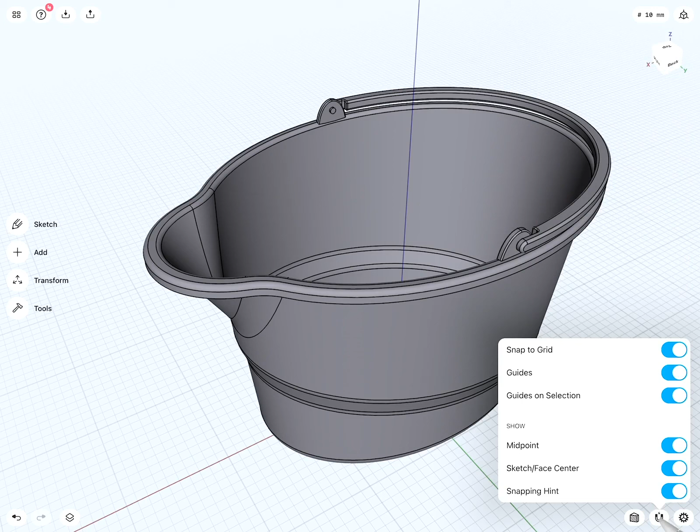Further, the reference file includes all the individual modeling steps, so you can study how I approached solving this design problem. Before we continue, we want to make sure that units is set to millimeter and all our snapping and guides are turned on.

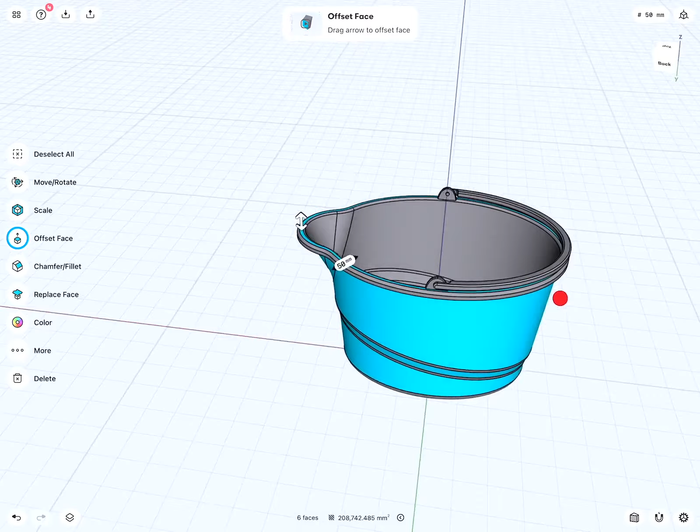For reference purposes, to study, analyze and learn from this model, I included the final design inside the Shapr model. When we look at the surfaces, we can see various design problems or surfacing challenges. For example, these two surfaces are offset, plus there's a transitional surface. We have a spout that is very nicely joined, and we have a rim with a thickness that runs all across, and to make matters even more complicated, the bottom face is at an angle.

Now all this looks rather complicated. It is, however, very easy when, instead of seeing the complexity of all these problems, you break it down into smaller problems and then solve it via smart sketching and modeling.

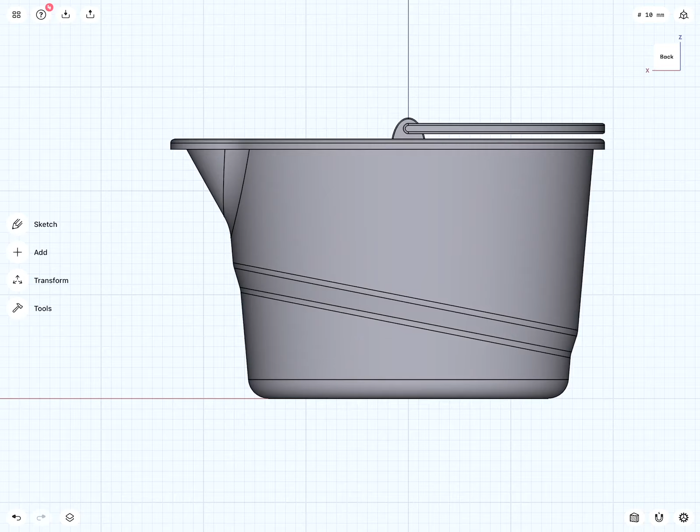So with that said, let's go to bottom view. We will make a sketch, ellipse from the center, a sketch that is 160 by 110. There we are. This we will call base.

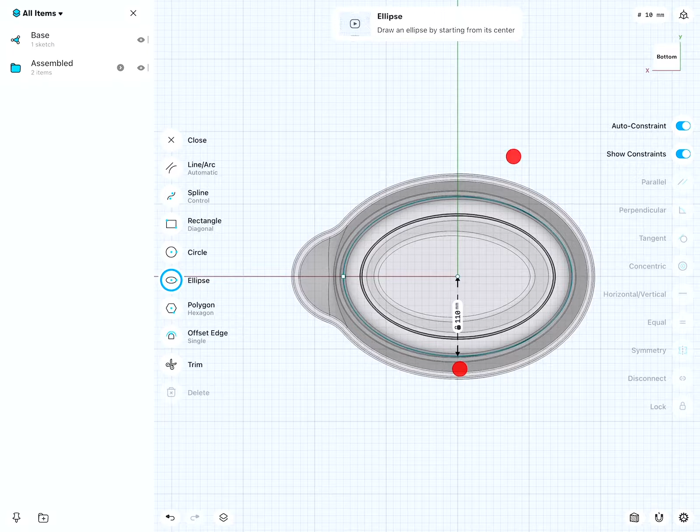And I will hide this. To match the design, this has to be extruded up 250 millimeters, and we will add a draft of -5 degrees. So you see, this shape could also be created via two sketches and a loft. This, however, is much faster — one sketch, one extrude with a draft.

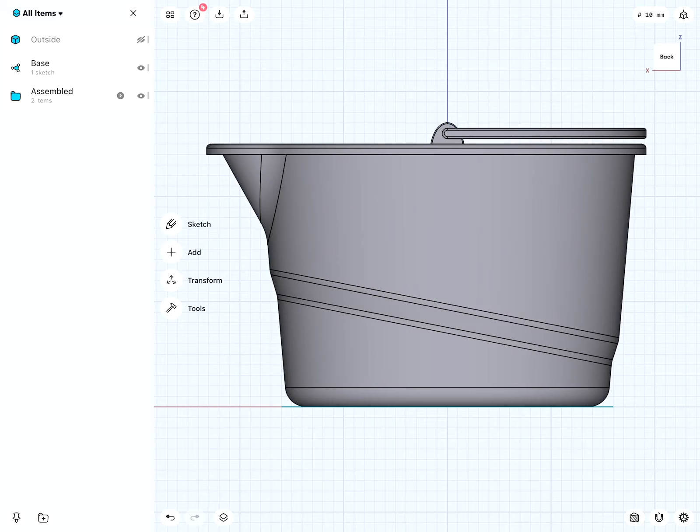We will call this outside. And I will hide this. Take a look at this view, and we see that now we have this surface that is offset, or smaller, so it sits on the inside.

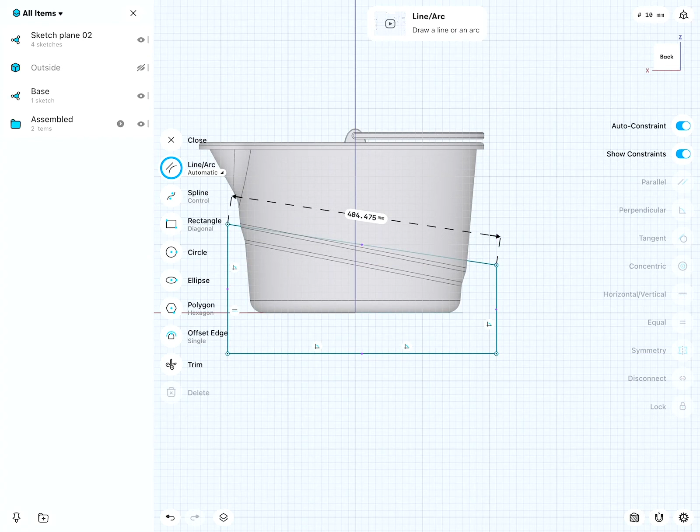To create this, we will continue making a sketch like this. This should be 101. We make another line. These two lines will be parallel.

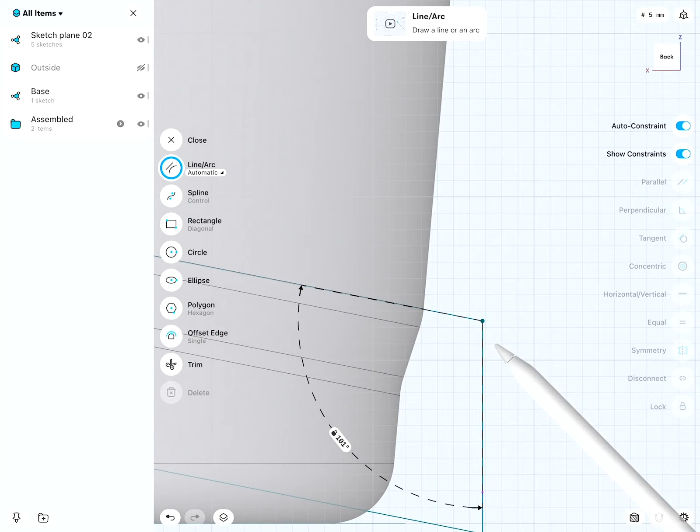Then we can zoom in more. The more we zoom in, at one point you see the grid will refine nicely. There, this position is good. Lock it. At this point we can move up.

These two lines have roughly a distance of 28 millimeters. Very good. We will call this also trim. And I can select these two profiles and cut. Then I select this and cut down. Now it works — two steps.

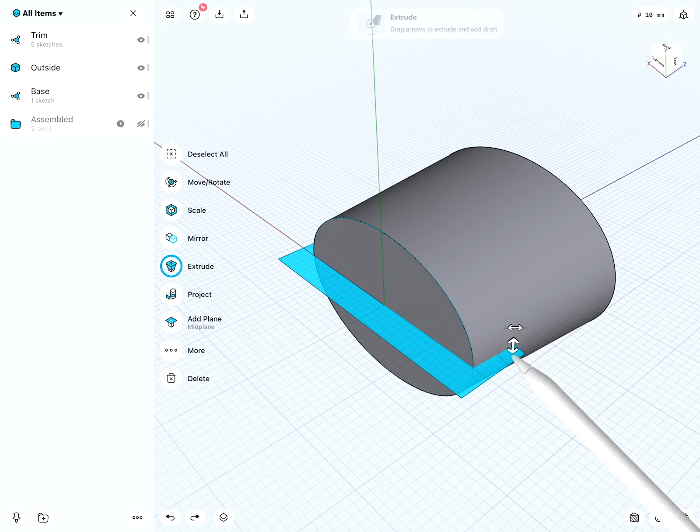However, I would like to make this even easier. So before I continue, I will select the whole sketch and move it down 200 millimeters, because now I could select and simply cut the whole piece out. Very good.

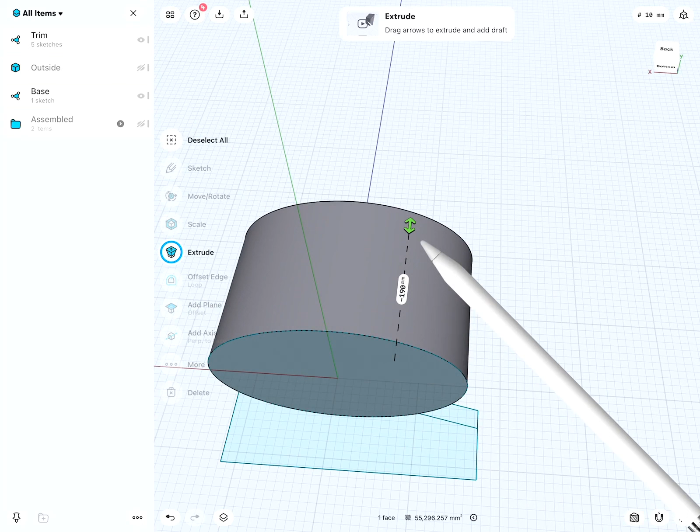This I will hide. Let's make another body: 190, -5. Very good. And then I select this, go up, and here we select intersect. This will be the inside.

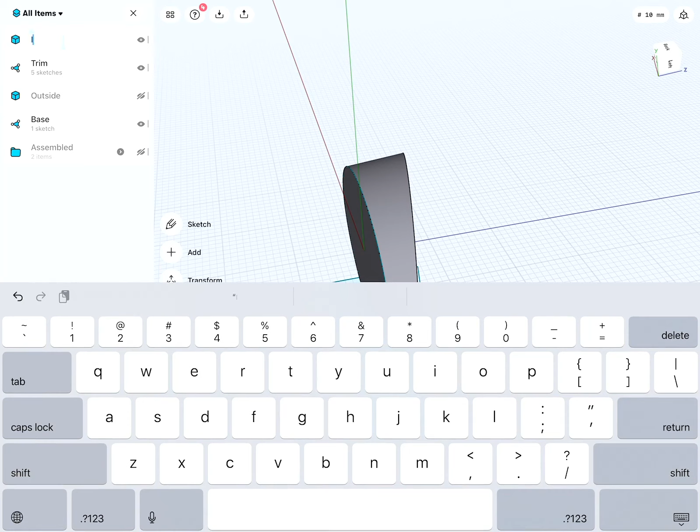And when we take a look at this, you see the sides are kind of like the same. So the surface now we have to offset. I will use 5 millimeters.

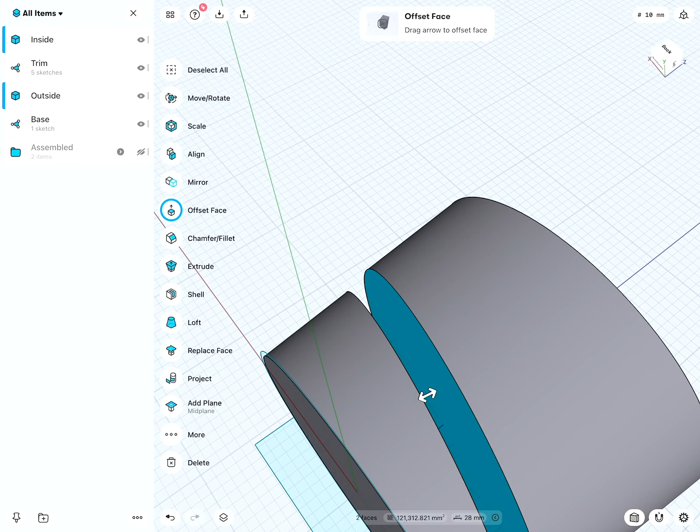To create the transition between this face and this face, we will use the loft command. There we are. And then selecting all three objects, select union to join them together. Let's call this bucket.

We will go back for the next step soon to the base sketch. Before we could do this, let's add a 15 millimeter radius there, and here we can add a 25 millimeter fillet — radius, sorry.

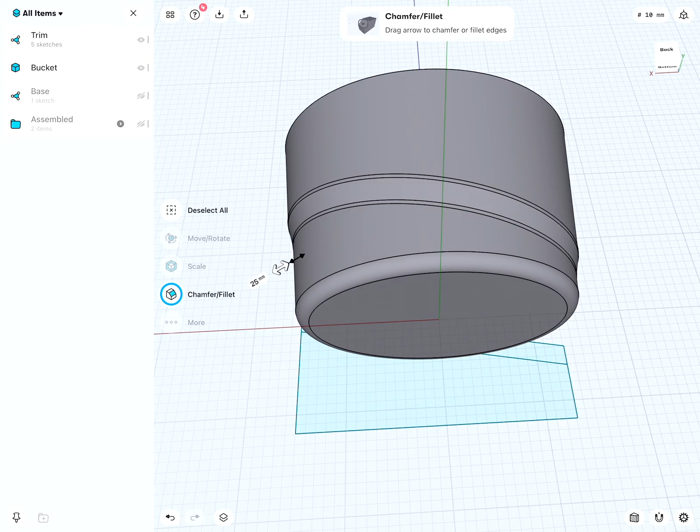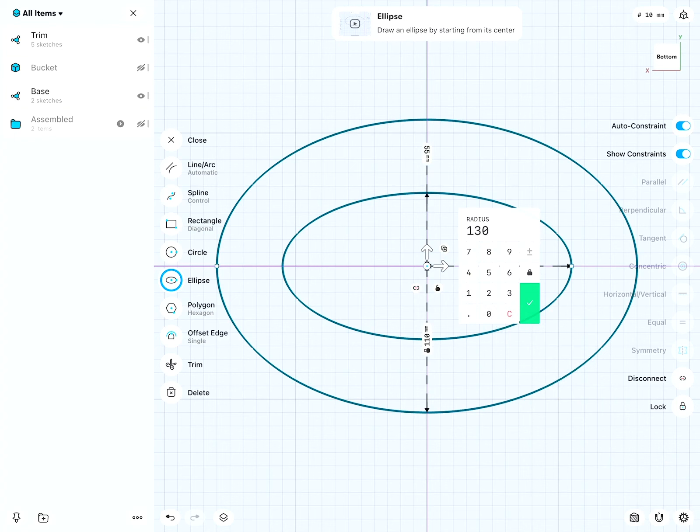Let's go to base, turn bucket off, select this sketch with a finger double tap, and we will add an ellipse again. This will be 130, and this 110 minus 30 is 80. So we have, from the bigger to the smaller ellipse, an offset of 30.

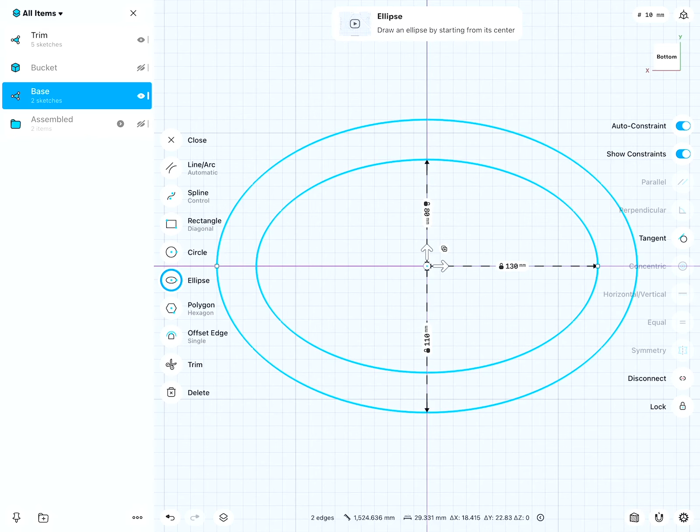When I have very basic geometry, I like always to redraw it by hand instead of using the offset command, because very often offset commands will create a more detailed offset path. So in this case, this was not very complicated to do.

We will show the bucket one more time. Then we will select this new fill, extrude it 20 millimeters in, and it cuts. And then we add a positive draft of 45 degrees.

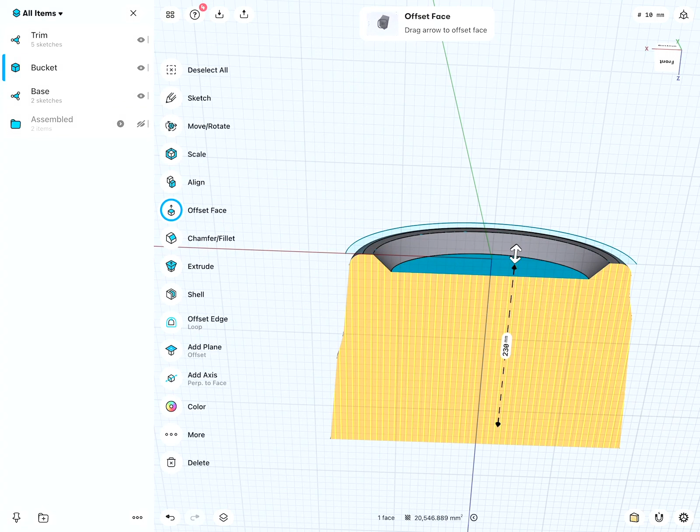Very nice. And we would like to rotate this face. So we can select it, then go to move and rotate. I made sure where I want to have the spout later, and this I rotate by 3 degrees.

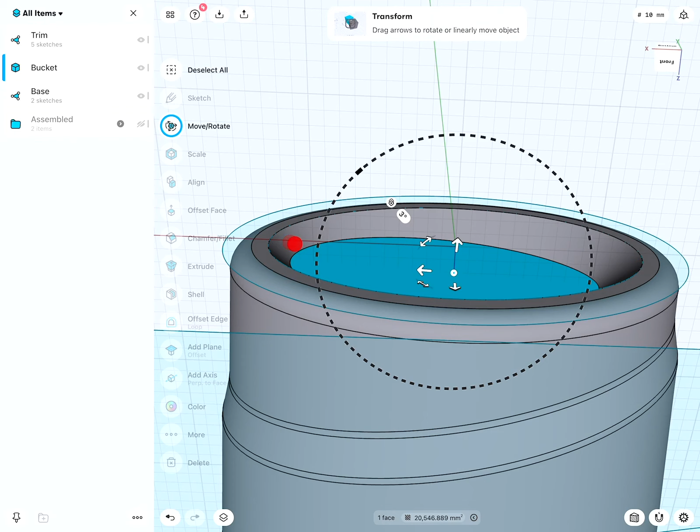The spout I have on the left side, so my hand to hold will be here, which means this has to be 3 degrees. So I have a bigger area here — I don't need a bigger area there. Very good. Now then I can go ahead and round these edges 15 millimeters. Very good, this looks nice.

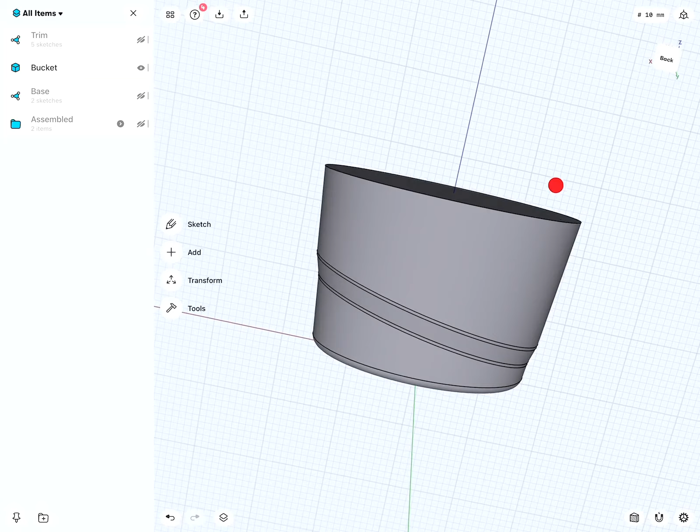The next step now would be to create the spout. I will select the top surface with my finger double tap — that lines up the grid. For reference purposes, I can turn on the target object, go to spline, CV, and start drawing.

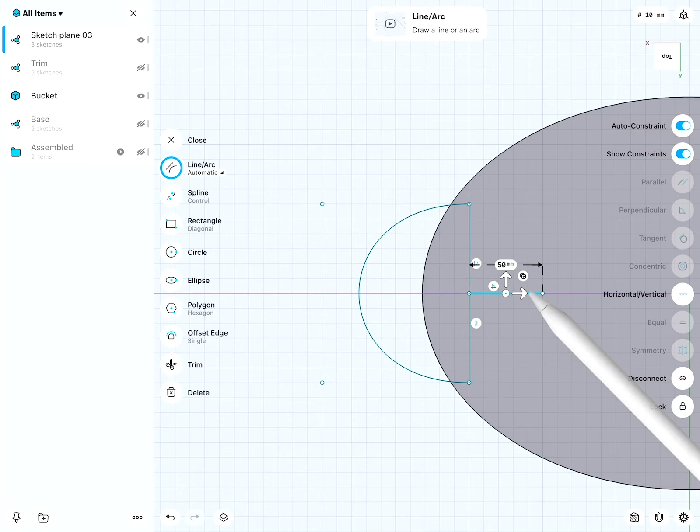And I press and release, go back to line and create myself a quick profile. This all looks really good. Just a little tip: you see here the midpoint is lined up to the x-axis, which means then I can use the grid and simply count the positions and make sure all these points along this line are symmetrical. Very good.

This I will hide. This whole object I will extrude down 90 millimeters, shrink it via the draft. And here comes now the interesting trick.

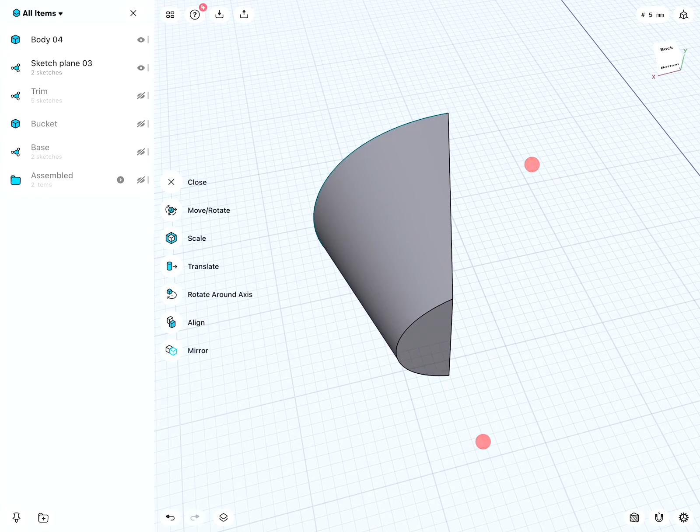We will select the face and this edge, turn on bucket, and then we just move it in there. And then there we have this beautiful transition.

So you see also here, the spout we just create via one sketch and one extrusion command, and then we move the target edge. So we don't need two sketches for loft.

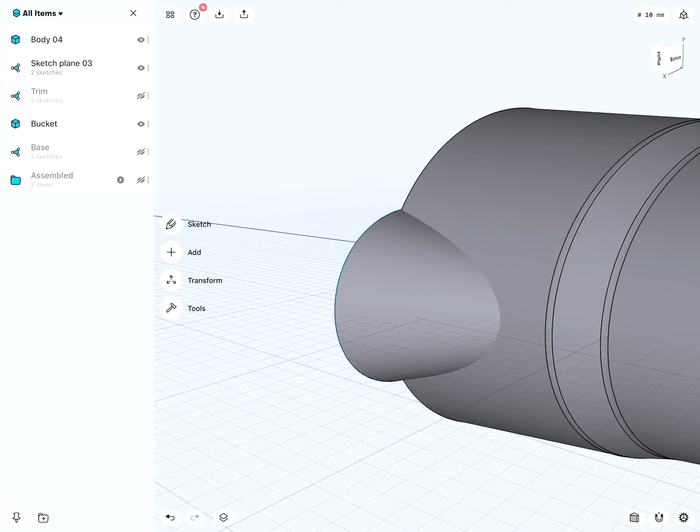The two bodies we will join. So they are one. Very good.

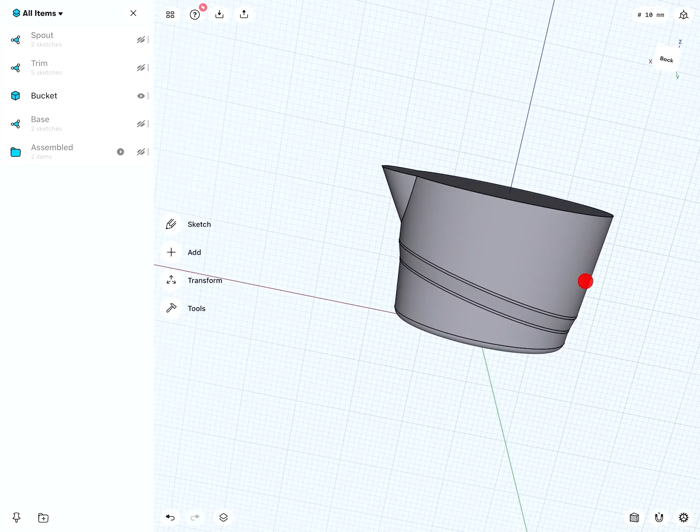This we will rename spout, and hide, we don't need it for the moment. So you see, so far this was actually a fairly simple process.

We give this a really nice and generous fillet, 50 millimeters. This is very good.

And to now create the rim, we'll go to the back, and we'll go to here and draw myself a line. 16 millimeters. This goes down 10.

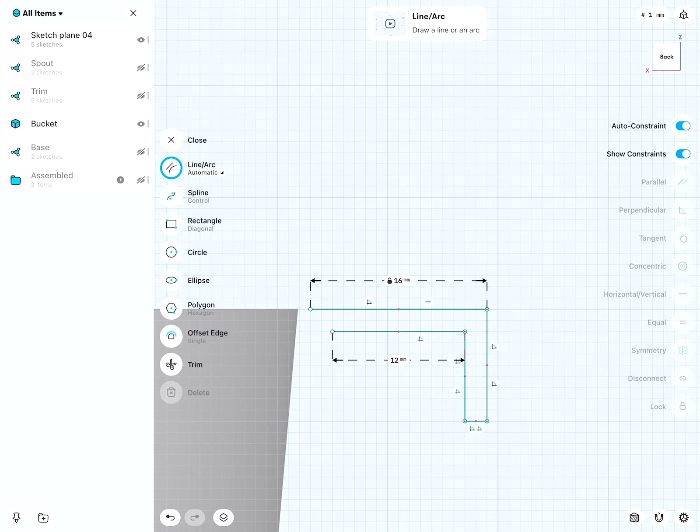2 millimeters. I use the grid here, or I can also give specific dimensions to make sure everything is the same, the way it should be. Could also say these two lines should be the same, so I use simply equal.

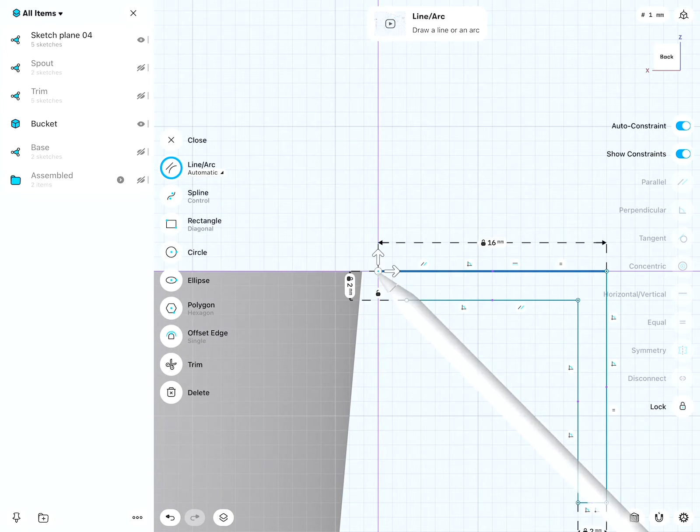And because I'm using the grid and the first body was extruded up with 250 millimeters, terminating at the grid, I don't need to project any line from this 3D model into the sketch. I simply use the grid and line up everything.

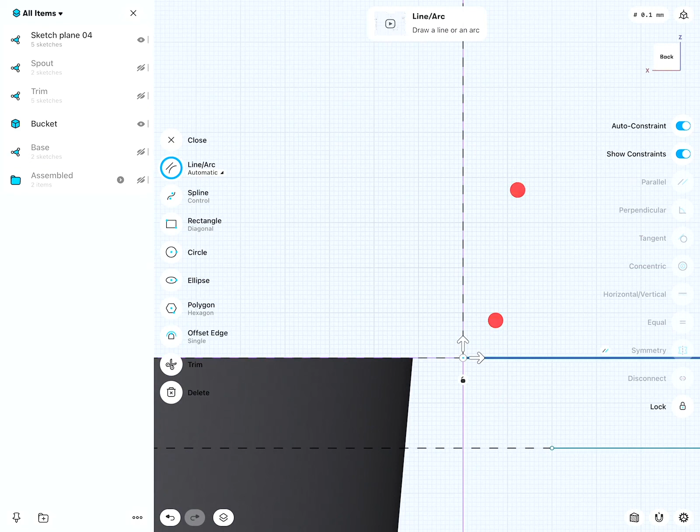So I will move this to there. We will make this 15. Now I bring this over, overlap this, so I'm overbuilding, and this I move to here, draw a connection, and then this point sufficiently move in there.

This is at a deep angle because this is a really deep line or angle there. You see that too. So I need to match this.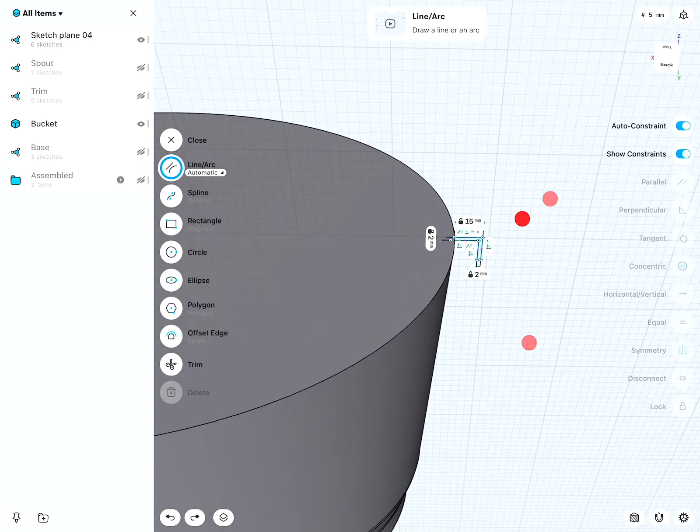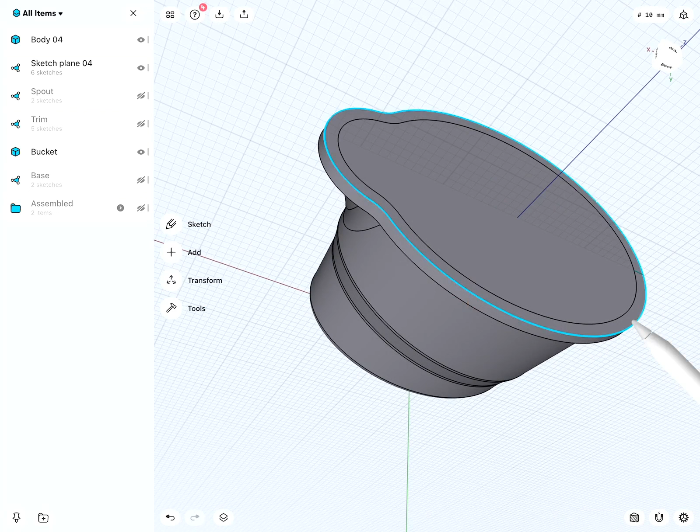Then I can zoom out, go to 3D view, select this profile, select all these edges, sweep, make a cut section, verify perfect, no gaps or anything, and the rim and this body I can join.

And then this. Let's call this rim. Very nice. Now the rim has a thickness of 2 millimeters, which means if we now shell this object, by

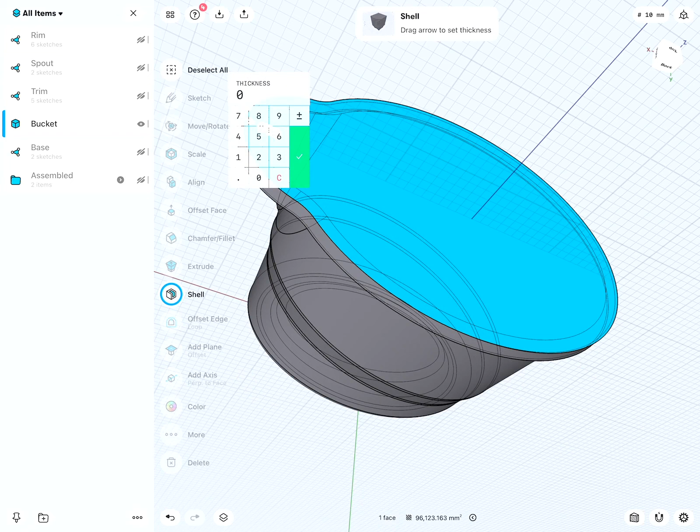selecting the top face, go to shell, we can only select it, or I can only select 2 millimeters or bigger. We can't go smaller because then the shelling would go into the lip. There we are. Very good.

Now we have here some very sharp edges, which is not good. This edge and this we will fillet with 1 millimeter.

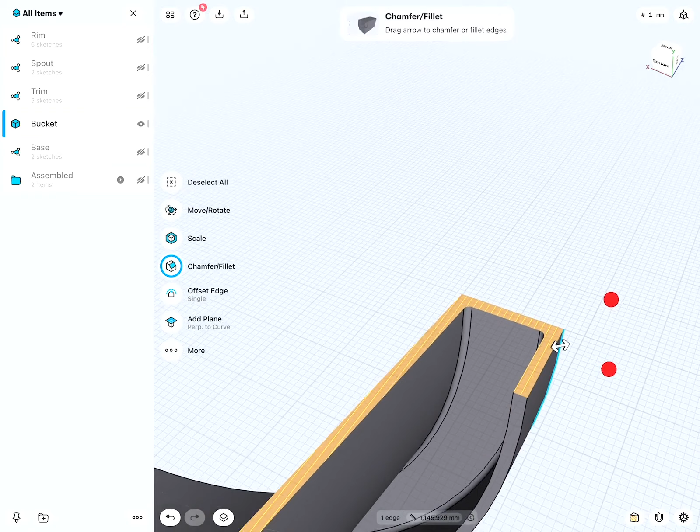These two have a thickness or an offset of 2 millimeters, which means then this is 2 millimeters plus 1 millimeter, means 3. So the outer edges have to be 3 millimeters.

So that we get a beautiful offset. Okay, very good.

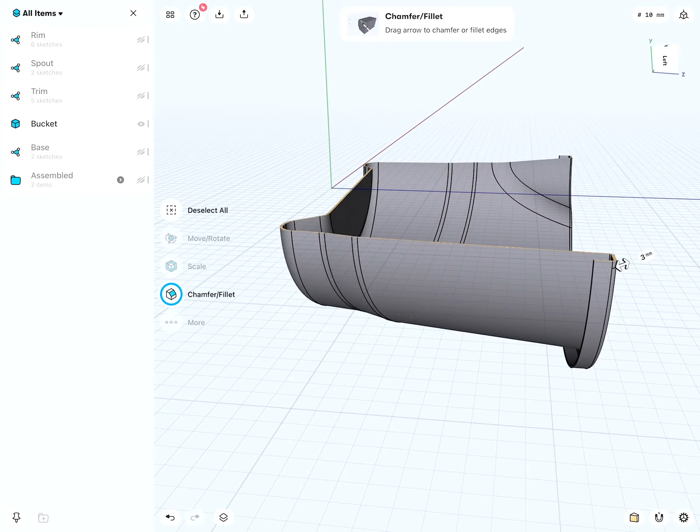So this is then the whole process, how we can build the bucket. As you can see, with a simplistic approach, only a few sketches, and then few modeling tools.

Then in this video, the next step then would be how we can model the handle.

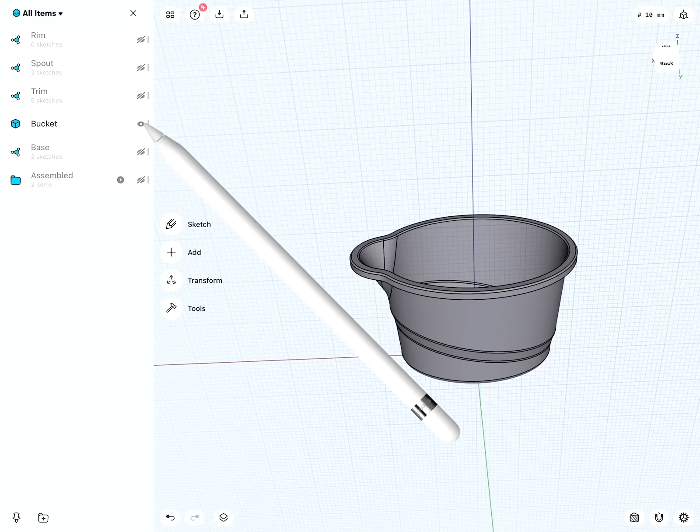I will hide this for the moment. Take a look at this. And there we can see we have these two sockets with a hole in between and the handle on top.

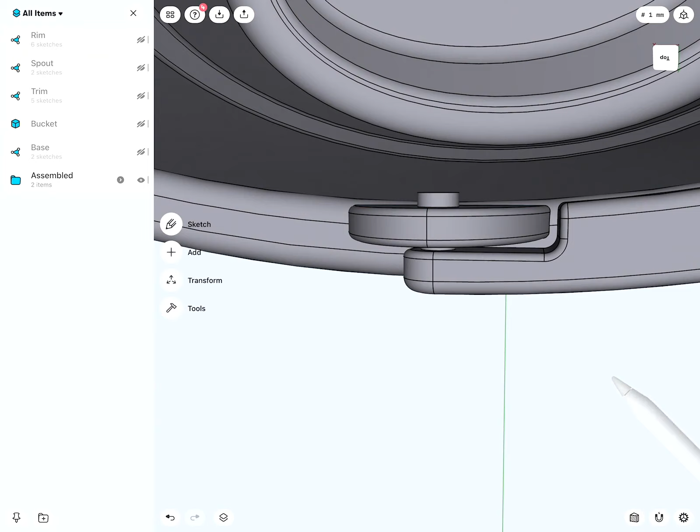And the handle also has a space and an axis. Also, this is quite simple to design. Okay. So we will

start from the center again. I will show my design here, go to there, zoom in a little bit, make a sketch, circle, and here this will be 3 millimeters. As you can see, this lines up to there.

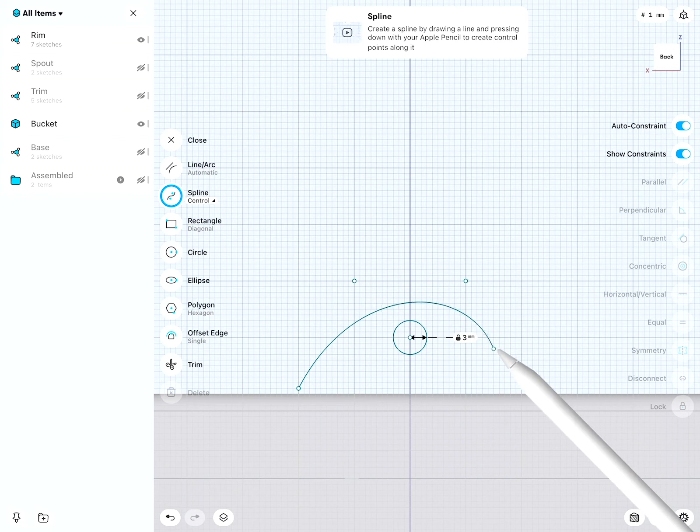Very good. I will use the spline curve one more time and create myself a nice arc that goes around. I will use here this to cap the bottom.

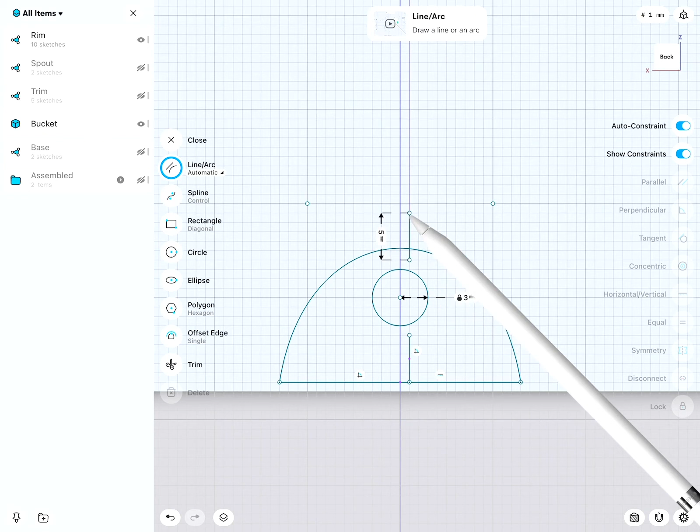Very good. So as you see, I clean everything up a little bit with the grid. So everything is symmetrical. This is around 5. So this is 5, which means then in these 2 points, when I select them, move them up there.

So this looks better. Very good.

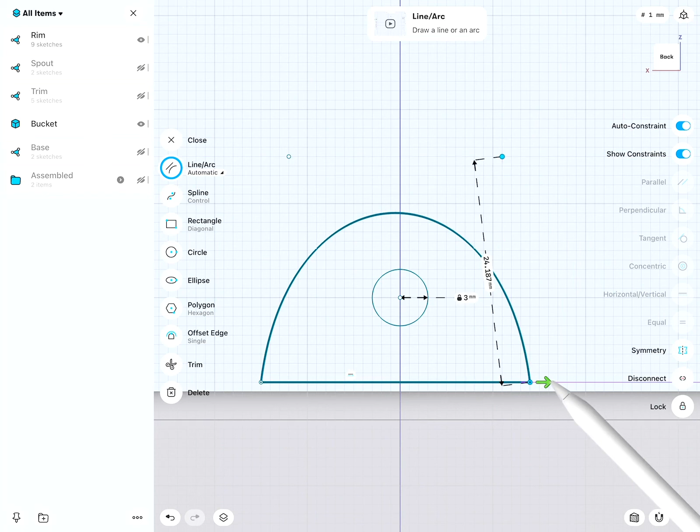To make things a little bit more thicker, select those 2 and then those 2, move them along the grid, 2 units each. Nice. And this I will move down. Very good. And maybe those 1 time up. There.

This was actually now added to the rim sketch. As you can see, this is joined. You can keep it this way, or if you would prefer to separate it, we can select this off our

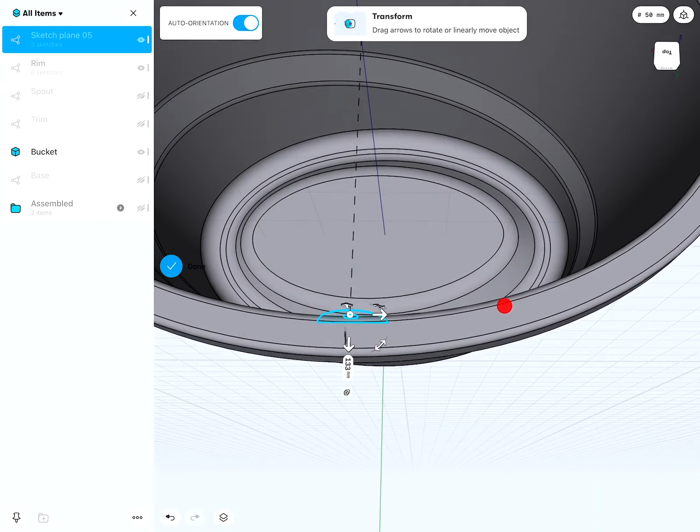sketch with the move command, then bring it over 133. Okay, very good. There we are.

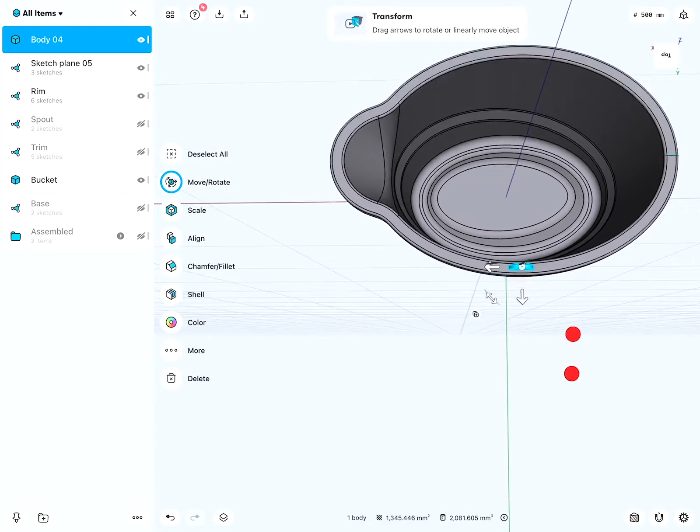We can select this, extrude it out by 5 millimeters. Double select it. Here's a nice little trick. You see the grid is vertical, and then I will go to mirror, select or simply tap on the grid, and that mirrors the whole piece over to the other side.

Very good. Now this we will call socket.

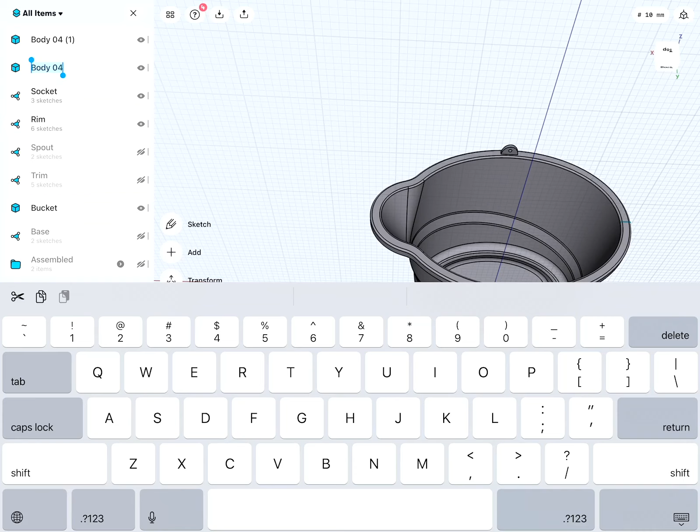And we could call the socket, but since we will join this later to the bucket, I'm not bothering with giving those a name. Everything else we can hide for the moment. We don't need. Also, this copy I will hide.

And I would like now to create the sketch for the handle centered on the cylinder.

When you select a cylinder, we can add an axis that runs through it. Then we can go to Add, Construction Plane, through Edge at an angle, select

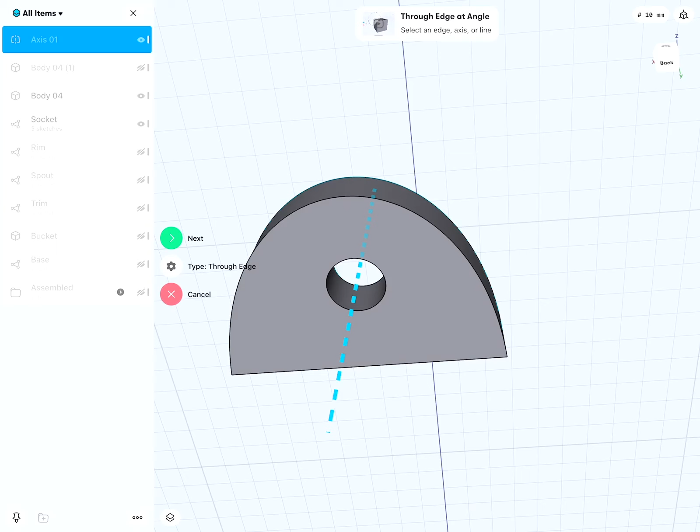this guideline, next, and this should be 90. That's horizontal. Very good.

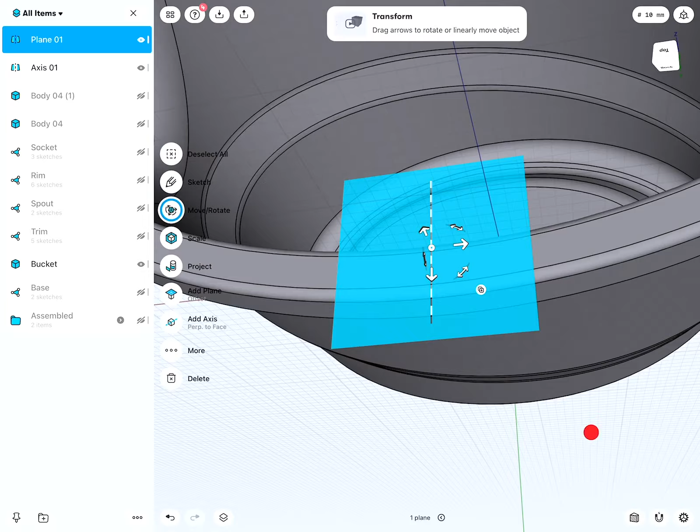Let's hide this for the moment, and also socket. Then we want to see our bucket. Select this construction plane, and then with our finger double tap, and now we are sketching right on this construction

plane. We will do an ellipse again.

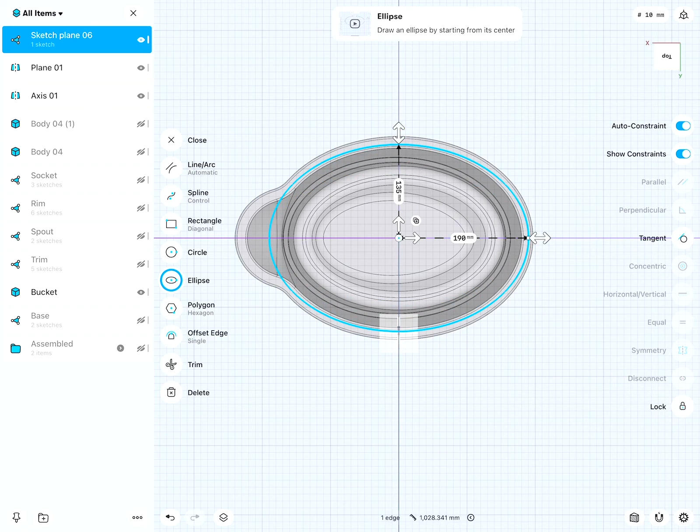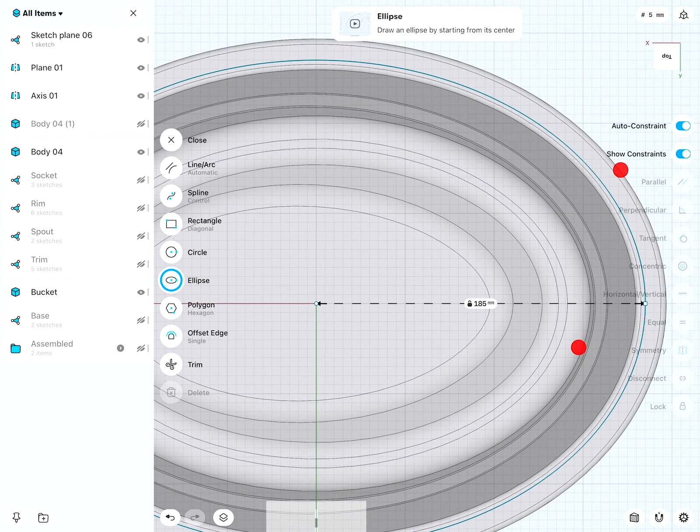It will help knowing also where our socket is. So this looks pretty good. So 135 by 190, so this is too far. 185, this looks better. I can see that all the elliptical shapes of my 3D model line up also with the sketch.

Then I will make one more ellipse, 195. So it's on it, very good.

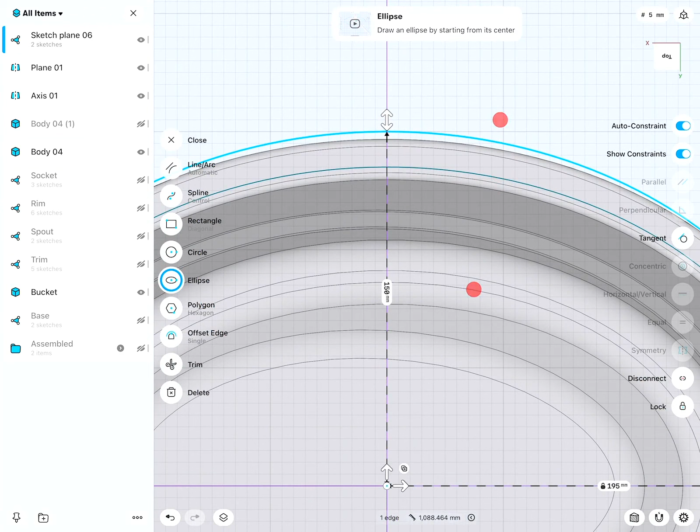Zoom this in. 145. Okay, yes, very good. Here's a little trick, because I want to work smart, not hard.

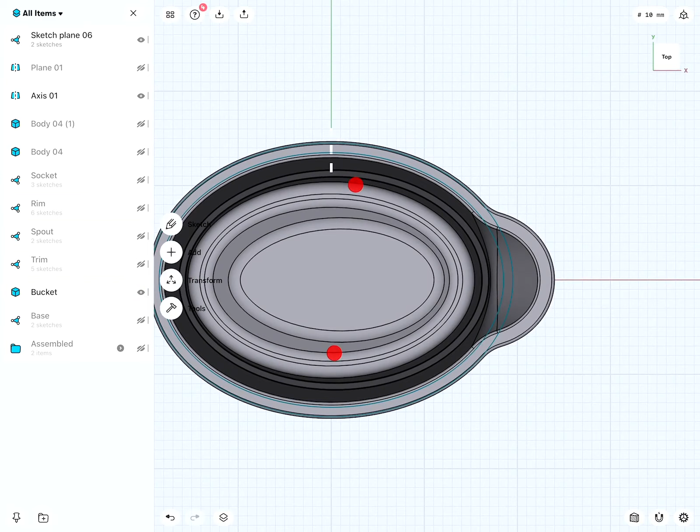I will create a line here, but be careful. You see, I just drew the line, but it put it onto the ground plane. So I will select this sketch one more time, put my finger, double tap. Now I draw this line into the sketch. Same here. Very good.

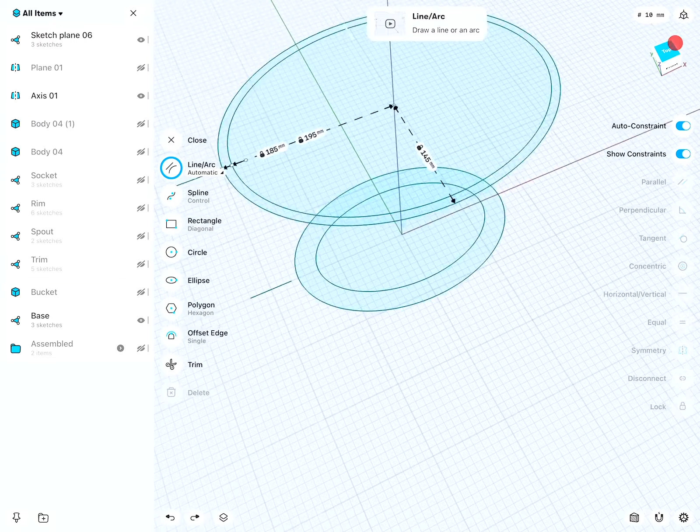I noticed that actually there it drew it over this axis, so I will hide it. You see I made the mistake one more time. So it's an easy mistake, by just going to top view. You just want to select the sketch or any plane, then double tap on it.

Then you're drawing in it. Now we can show these elements. Let's zoom in. We give this a distance here, go over to there. Snap this to the grid. Snap this to the grid. Very nice, so you see it's a millimeter distance.

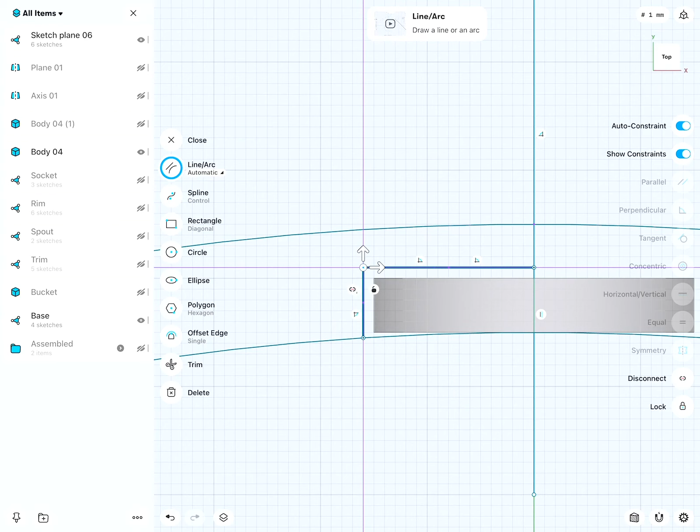Very good. So the reason why I did everything that way is, well, why should I make myself work hard when I only need to model this one side?

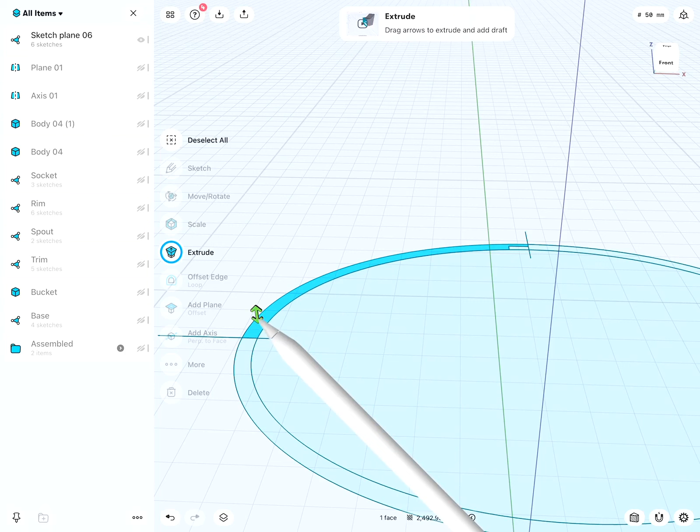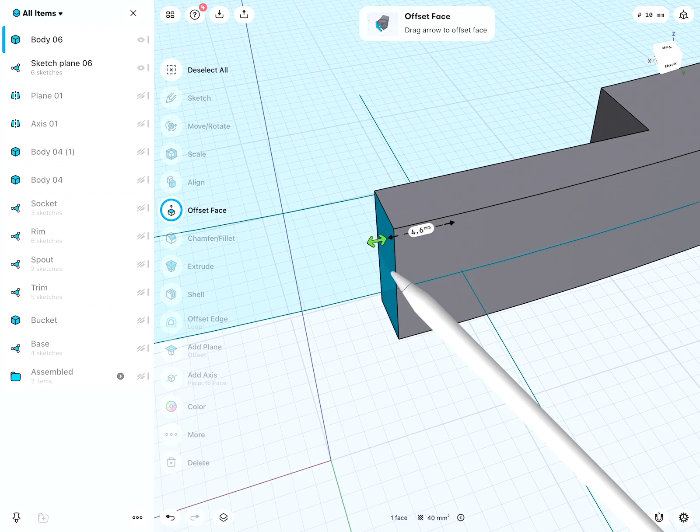So I extrude this down 5 millimeters. Then I will adjust the height to 10 millimeters. And we would like to add here 10 millimeters to it. Or actually 5. And then these two edges we round also by 5, turning this into a perfect cap that's round. There.

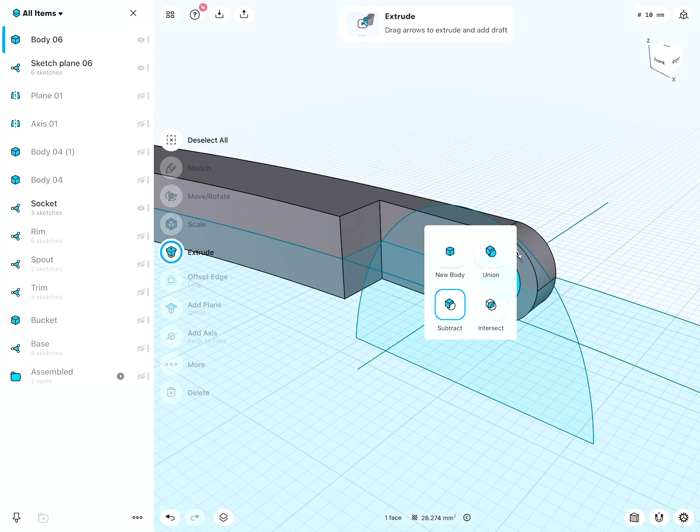Let's take a look at our elements here. There you see, this looks really, really good. Here's our socket. So from there we do an extrusion, but instead of cutting into it, we do a union, we join it.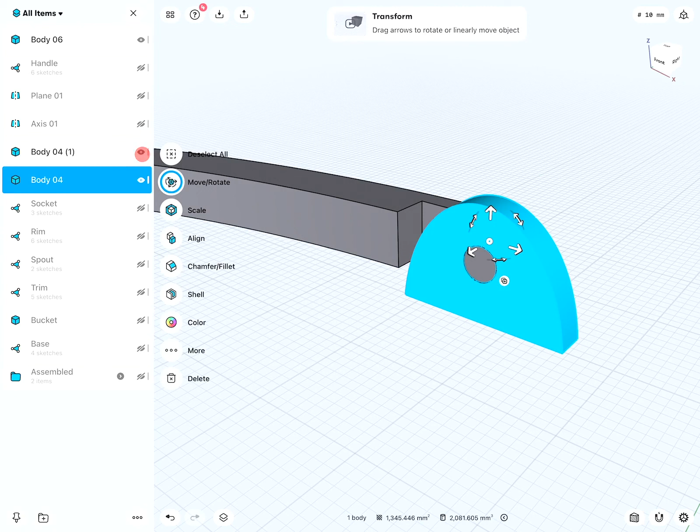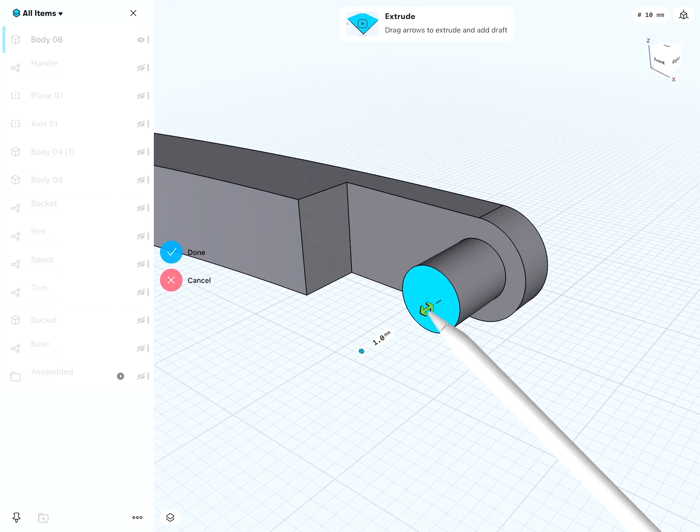What's the distance? This is 5 millimeters, which means if I would like to perfect this model a little bit, this I would like to extrude. By another 5 millimeters. Okay, so, and it's joined.

Very good, so you see that this is now inside it. Oh, actually it's not. Oh yeah, that makes sense. Sorry, my fault. This was already modeled flush added.

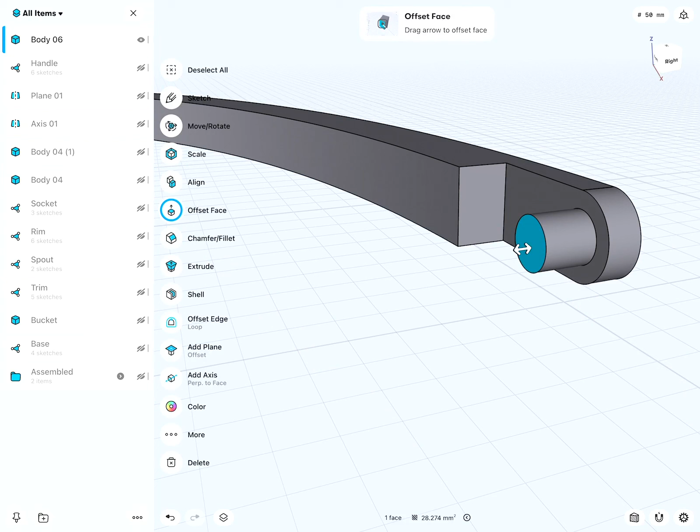So this we only need now to extrude by, let's say, 2 millimeters, and I will do a new body. The reason why I did a new body is now I can select this, set this to 4 millimeters, so it's a little bit bigger, and then this and this I will join.

Very good. And then the whole object I will mirror over to there. Select both, join. Very nice. And there we are, that's our handle.

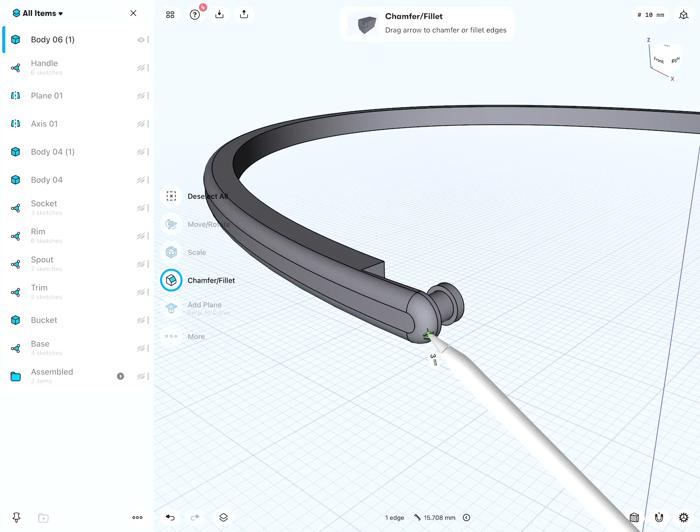And now we can round all the edges nicely. 2 millimeters. Also this 2 millimeters. Round this by 2. Round this by 1. And then we do the same here.

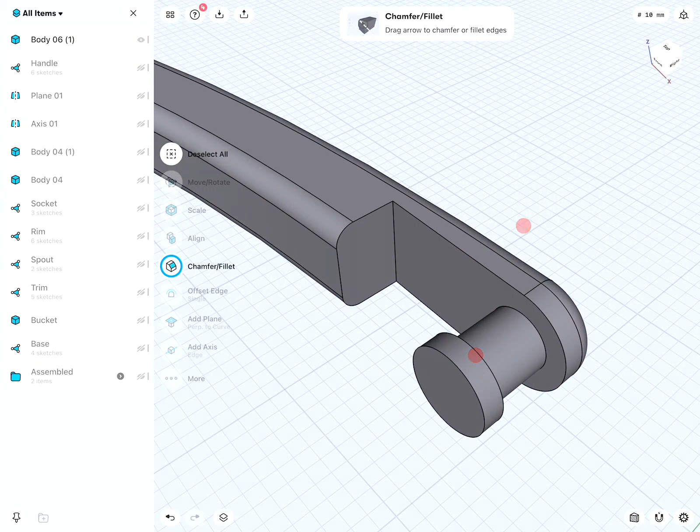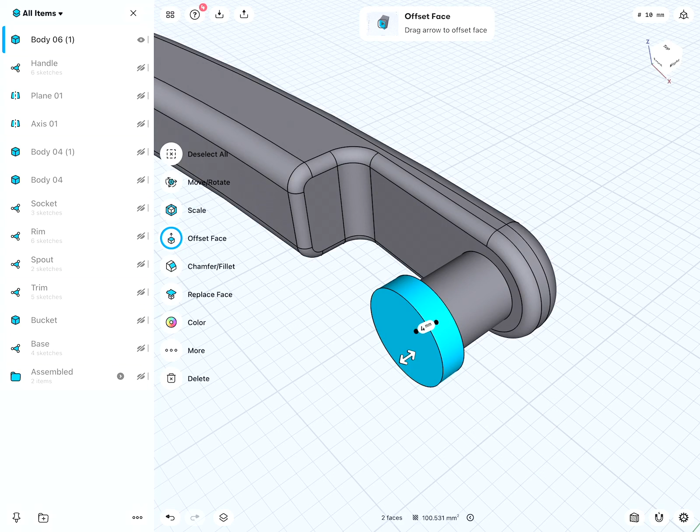Very good. So this rounding I did right now, I could have done also on half of the object and then mirrored everything over. These elements here are not, technically speaking, from an engineering standpoint, perfectly correct. They need to be a little bit carved out, but this would be beyond the scope of this video, so understand that this is just a simplification.

Let's call this handle. And our last step to do is we need to join those to our bucket. There, and there, and this, and join. Let's see if this works.

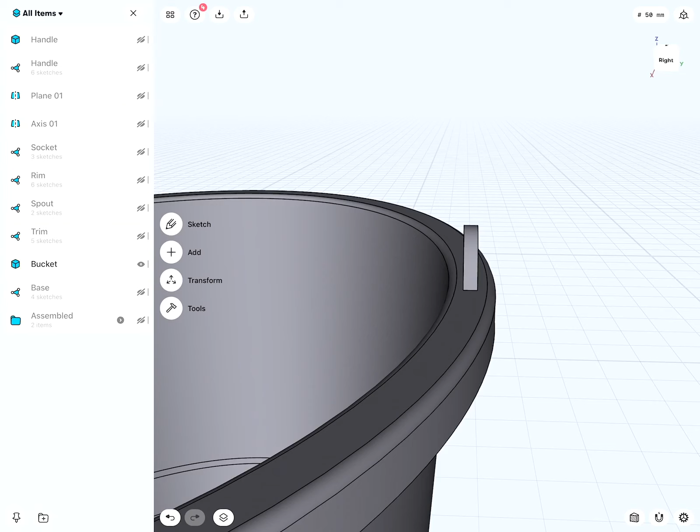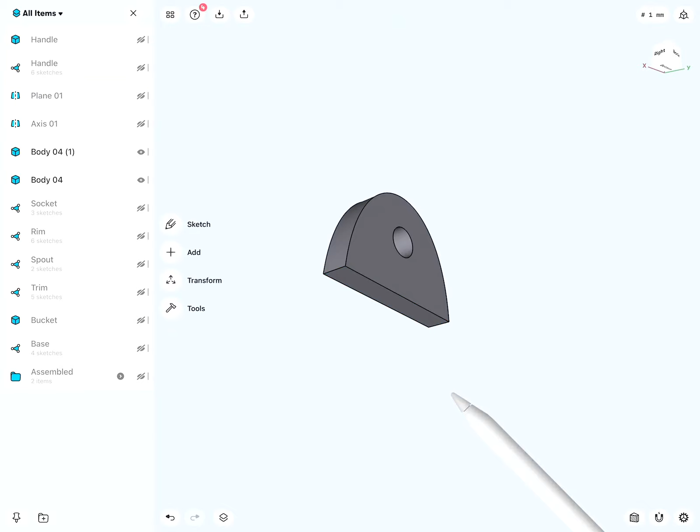It did. Very good. The sockets were sitting right on the bucket. So in case, just for the sake of explaining, in case it doesn't work, when this is not intersecting, we can also extend this by 1 millimeter. Let's say here too. And then the surfaces truly much better intersect.

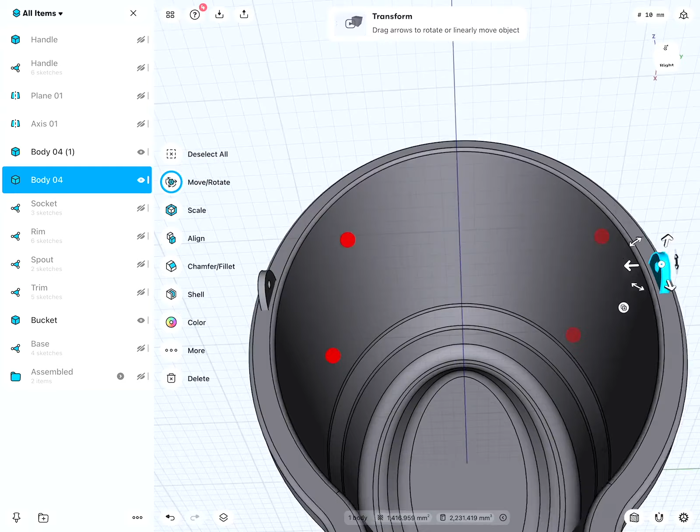There you can see this now, how they would intersect. That's in general, the term is called overmodeling, and this will help then the software understanding where the volumes are and how to calculate it together.

Last step here to make this a tick more refined. Just 1 millimeter, very good. Let's take a look where everything finished.

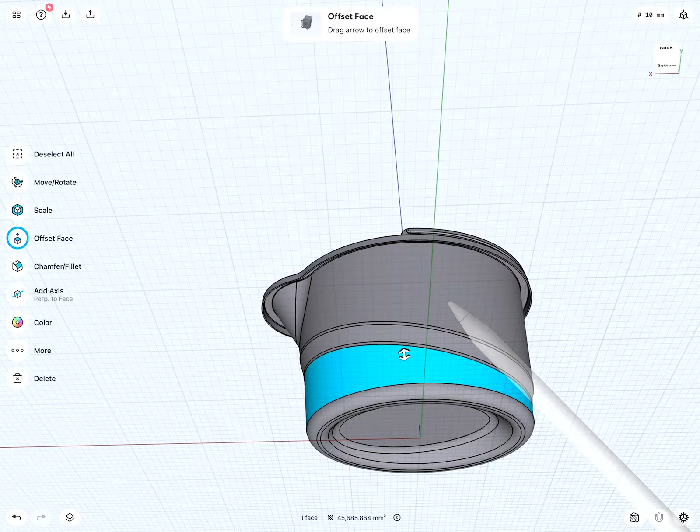And there's actually now our finished bucket. With all the surfacing details we wanted to have, more ergonomic space for our fingers down there to hold, a nicer look with offset surfaces at the sides, a clean and well-working spout, a lip or a rim that stabilizes the bucket, and then here we have a handle that follows exactly the surface.

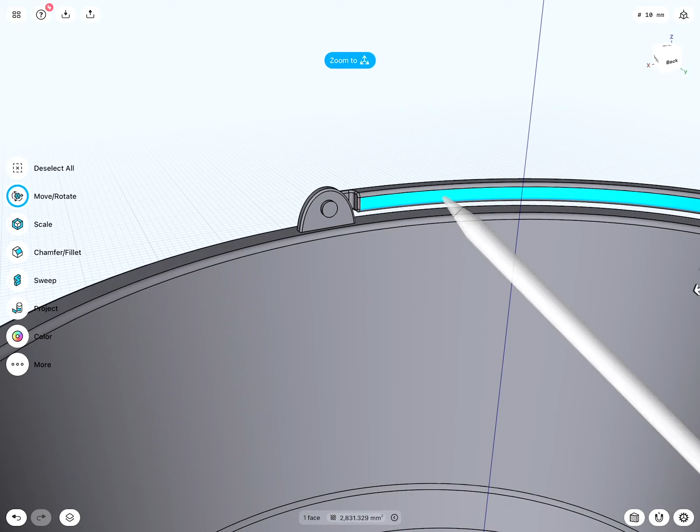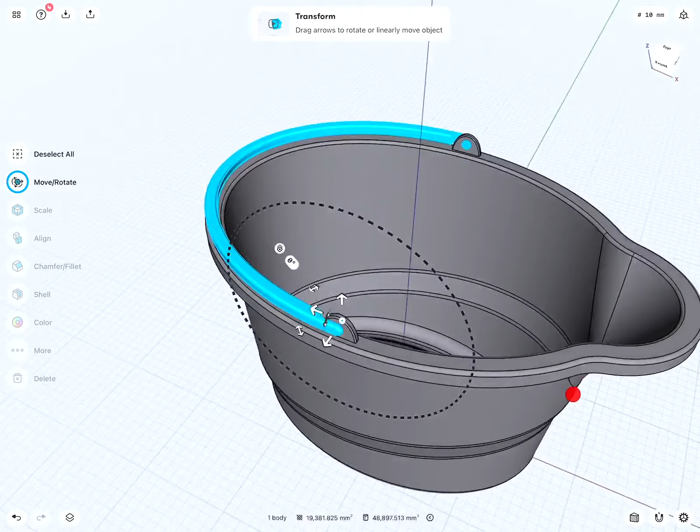For simulation or prototyping purpose, if you would like to rotate the handle, we can select it. So double tap, and then we move this to the cylinder, which then acts like an axis. And we could just rotate it and see how this would work. Very good. And that's it.